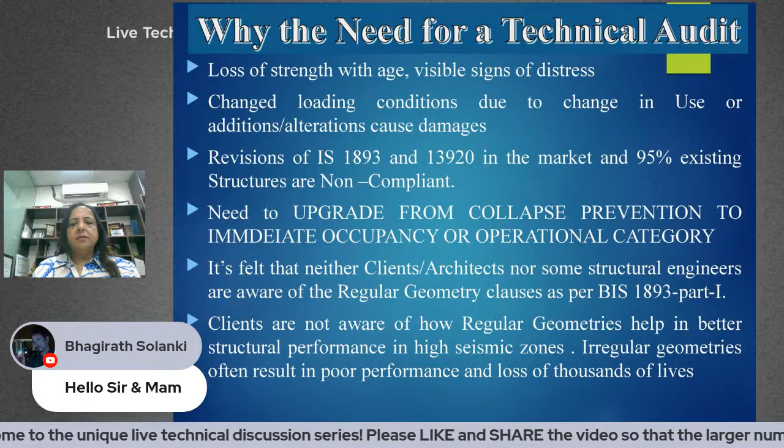We need technical audit because with age, buildings lose strength and there are visible signs of distress. Also, there are changed loading conditions sometimes due to change in use or additions and alterations carried out by the owners, and some structural elements may, in the process, get damaged. There are revisions of IS 1893 and 13920, our earthquake resistant design code and ductility design code, and 95% of existing structures may now be non-compliant after the 2016 codes came in. So there is a need to review the compliance aspect and carry out an audit and retrofit if required.

Then there may be a need to upgrade from collapse prevention design to immediate occupancy design, or even operational category. For important building structures, owners may place a demand on the structural engineer to upgrade earthquake safety. It's also felt that neither architects nor clients, nor some of our own structural engineers, are aware that regular geometry clauses are there in IS 1893 Part 1, telling us that regular buildings definitely perform better in earthquakes, and we must follow the guidelines as far as possible while planning the geometries of buildings, especially in high seismic zones.

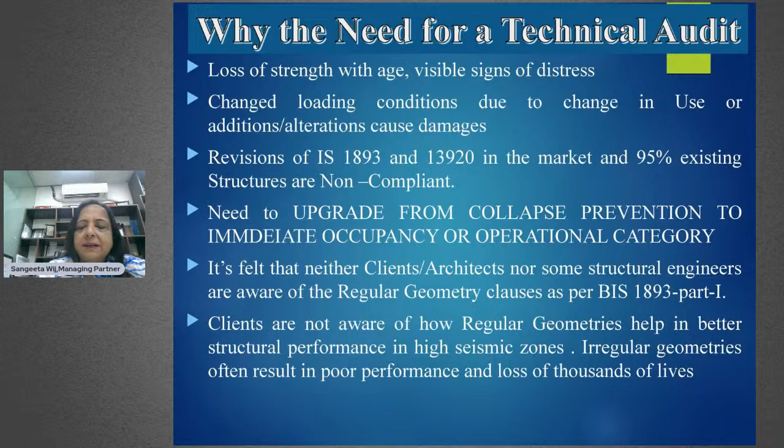Irregular geometries often result in poor performance, as has been proven even in our last experience of a major earthquake in Turkey and Syria.

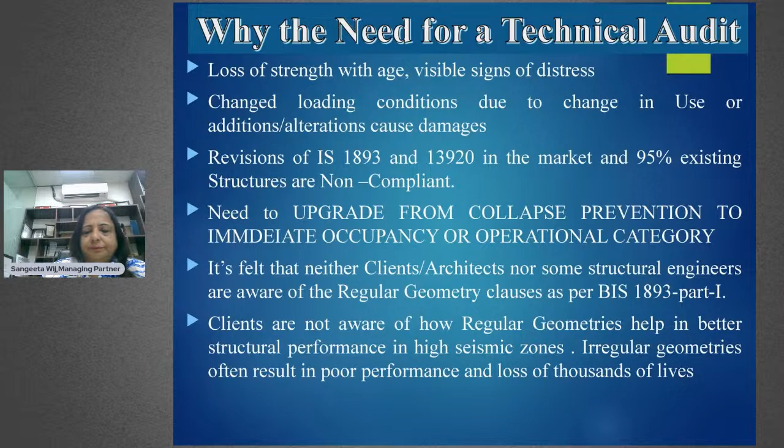In fact, in the National Building Code, there is a requirement in chapter 2 on administration, clause 14.4.2, which reads that all buildings must be subjected to periodic inspection by a team of multidisciplinary professionals of local authority. This work may be outsourced by the authority to competent professionals as deemed necessary. The team shall ensure compliance of bylaws, natural lighting, ventilation, etc., besides structural safety for designated public buildings and areas. This inspection shall usually be carried out every 3 to 5 years, and in any case, not more than 5 years.

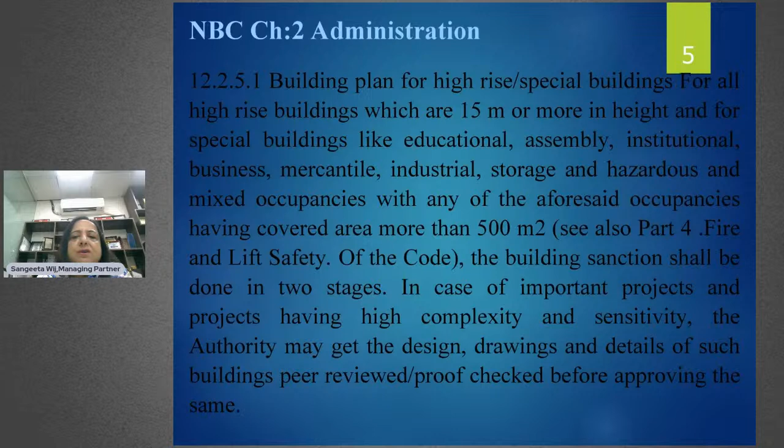What are the documents required for an audit? Architectural plans and elevations, if available, all structural drawings - normally these are never available for older buildings. Structural analysis and design model in StaadPro or ETABS - normally, with our experience, we've seen that it's impossible to locate this, especially for structures existing even 10 to 15 years. We are never able to locate the analysis or design model in StaadPro or ETABS.

Then it's important to look at the soil report and the groundwater test report, and a preliminary site inspection report is necessary for any observed tilting, bulging, unequal settlement deflections, cracks, or seepages.

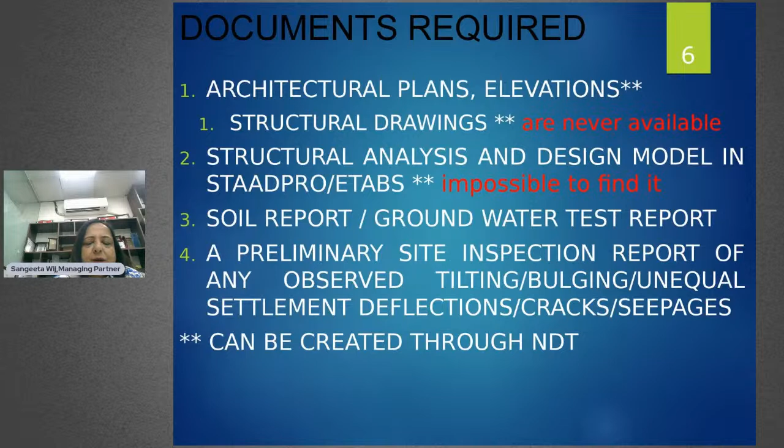So what I was saying is that supposing we do not have structural drawings, we can create the approximate structural framing and reinforcement drawings using suitable NDT techniques - we'll talk about them a little later. We can use rebar scanning to create the reinforcement profile. However, there is a limitation, because we can't do rebar scanning of all the beams and all the columns.

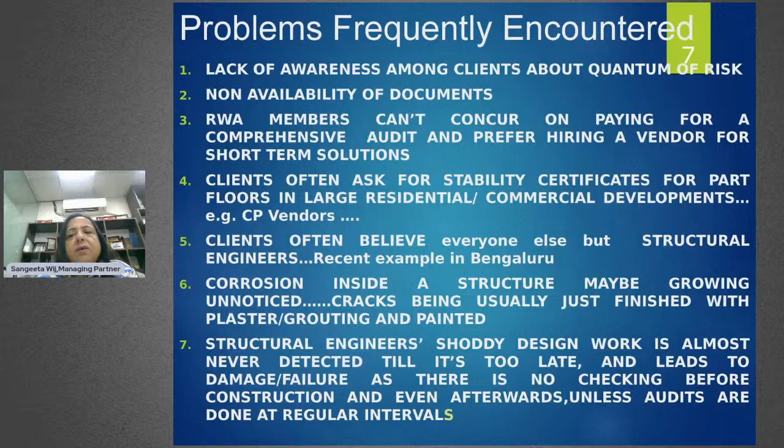So, which are the problems frequently encountered when we are doing a technical audit? The first problem is that clients have no awareness about the quantum of risk involved in continuing with an old and dilapidated structure. He's not aware what kind of risk he's facing, and he's worried he'll have to go through a lot of disruption in his normal routine. The building will need to be opened up, and the structure will need to be partly broken up to create suitable space for retrofitting.

So he's more anxious and worried about the money part also. Now, the biggest problem is non-availability of documents. Typically, RWA members can't agree on paying for a comprehensive audit, and they usually prefer hiring a vendor straight away - maybe the most popular thing is to hire a vendor for fiber wrapping, concrete jacketing, or steel jacketing and just get the retrofitting done.

Now, clients often ask for a stability certificate even for part floors. This is the biggest challenge - some of my friends and BNI chapter members call and say, I live on a floor in a particular housing development, can you please audit and retrofit my floor? That is unfortunately not feasible.

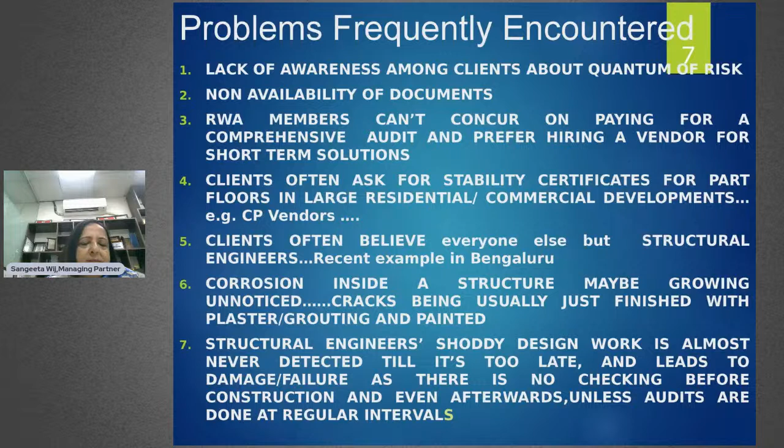Bhavin, I'm running into a little problem here. I can't read the last part of my slide because I'm seeing this message. Can I remove that? It's the seventh point. Can you read it out? Sure, it says that structural engineers' shoddy design work is almost never detected till it's too late and leads to damage or failure, as there is no checking before construction and even afterwards unless audits are done at regular intervals. So how do I get rid of this message at the bottom of my screen? It's slides, video file, and share screen. Okay, how do I go back?

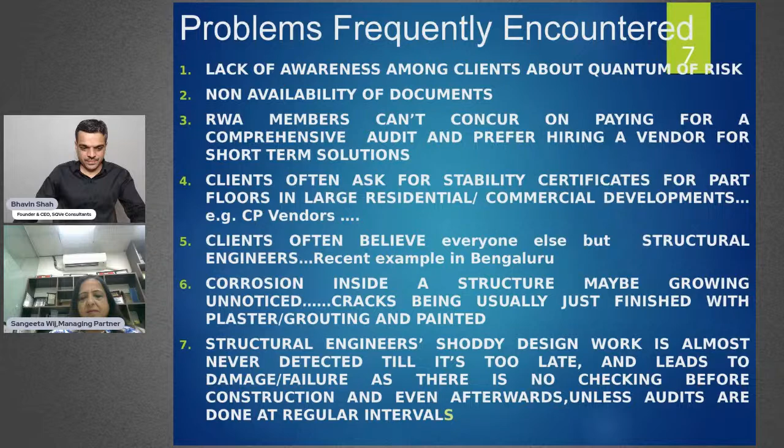So how to carry out a comprehensive technical assessment? Study the available information, including architectural and structural drawings, soil report, water test report, and analysis design model on STAADPRO or ETABS. I'm hoping all these things are available. If not, we need to carry out measurement at site to identify the structural system and create a structural framing plan with the beam, column, and shear wall sizes.

Next, we use rebound hammer or core cutting tests to establish average compressive strength of concrete in beams, slabs, columns, and foundations. After that, we use NDT techniques like rebar scanning to find reinforcement details and create a set of structural drawings. If drawings are already available, it's a bonus for you and the client because rebar scanning can be avoided. Otherwise, we have to create reinforcement drawings for the existing building before modeling can be taken up as a next step.

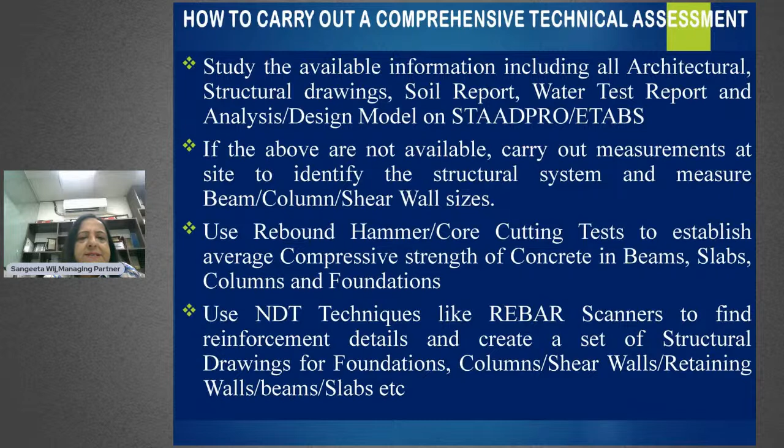So we create a model in STAADPRO or ETABS. However, the base shear to be used for earthquake can be reduced depending on the age of the building, as laid down in BIS 15988. The reduction factor can vary between 0.7 to 1, depending on how old your building is, the availability of documents, and how reliable are the drawings and documents available.

It's important to note that for analysis and design, we always use the revised current seismic codes, not the older versions. Some clients might tell you that my building was done in 1990, so check it with the 1990 code or the code prevalent at that time, but that is not the correct procedure. If we go through 15988, it's clearly laid down that all audits have to be carried out with the latest revision of the earthquake codes. All we are allowed to do is use the modification factor as per 15988.

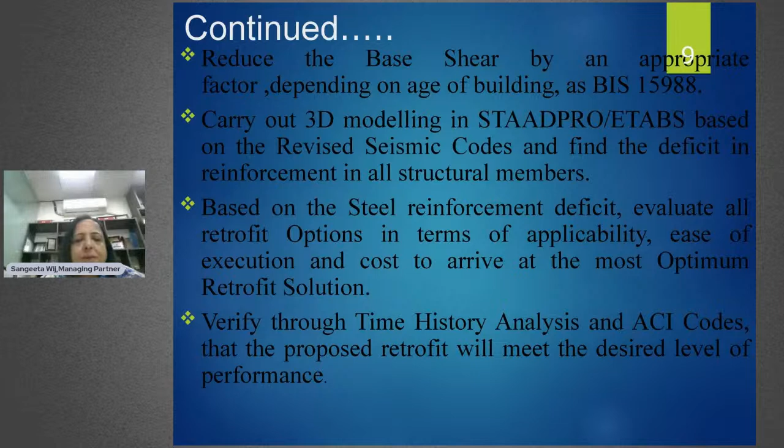So we have already talked about the NDT techniques available briefly. We do core cutting to test concrete strength, rebar scanning where reinforcement is to be determined, half cell potential test to check for possibility of corrosion, and UPV for checking integrity of the concrete within columns, beams, and slabs.

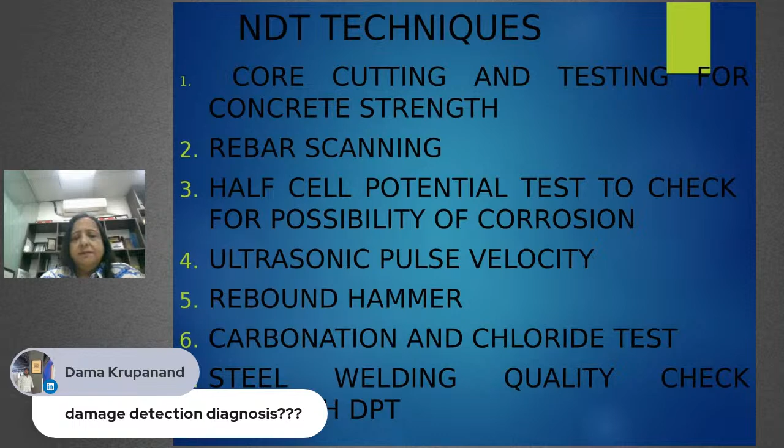Rebound hammer can also be used where the client is not allowing core cutting, however the results are not as accurate or reliable as core cutting results. We also do carbonation and chloride tests for concrete where we suspect corrosion. For steel structures, we can take samples of steel and test its strength, and also test the weld quality.

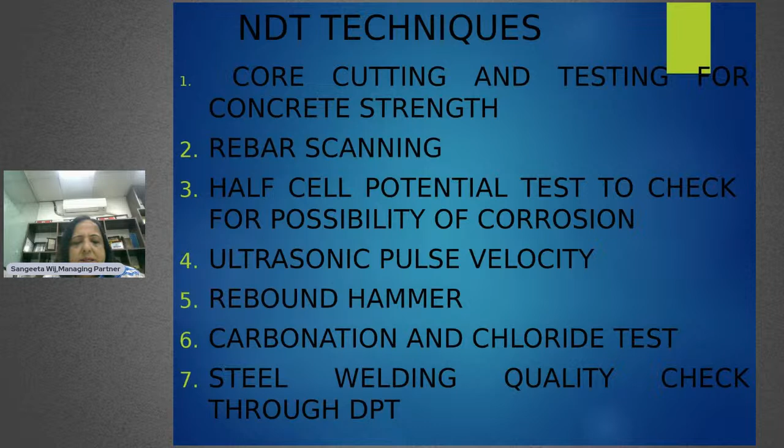For strengthening, we start with simple techniques like guniting or pressure grouting for masonry structures and abutments. For concrete, we can use concrete jacketing for moment frame structures. We can also do steel jacketing or carbon fiber wrapping, or provide bracings on peripheral walls while treating inner columns as gravity columns.

This applies to buildings where the client does not want you inside, which can be a functional industry or a functional hospital or whatever. So it is possible to treat a building only from the outside and create additional structural elements.

These will be designed to carry all the earthquake shear, or the additional earthquake shear, which the structure is not able to take. We can also provide dampers and add base isolation systems. And we can also add shear walls if the client allows you to do that.

In one of the projects that we had seen on Dwarka Expressway, we had to use sacrificial anodes to tackle acute corrosion status.

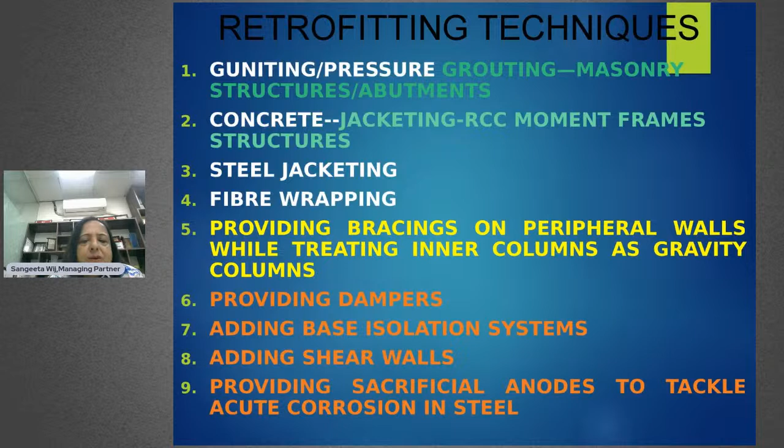So basically, I'm going to talk only till this point here. But I also want to show you quickly, in just the next 2 minutes, as to what do we mean by collapse prevention or immediate occupancy or operational status.

So world over, the earthquake safety of buildings is of 4 categories. The highest is fully operational, as practiced and adopted in Japan, LA, New Zealand and other developed nations. Next lower is immediate occupancy, then comes life safety, and then comes collapse prevention.

Our code in India had started off with collapse prevention. We were a poor country when we started talking in terms of earthquake resistant design, way back in the early 80s. But now the code is being revised to upgrade the safety slowly to higher levels.

And this is how these 4 levels look, and it should give you some idea. This is where our collapse prevention design is, mostly where the building will not have any reserve strength after a major earthquake has happened. It will be compulsory for the owner to dismantle and build again. It'll just give you enough time to evacuate the near and dear ones.

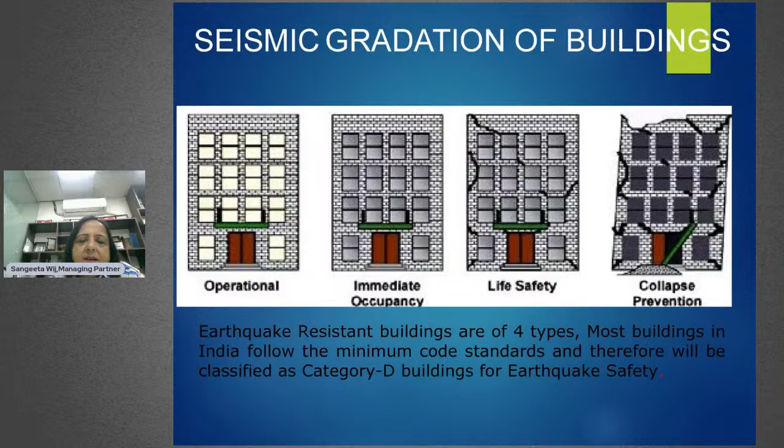Okay, yeah, so this is the first question I would like to take. I have this Ujma Khan from LPU. So she's talking - it's a she or he, I don't know. Ujma can be a girl or a boy.

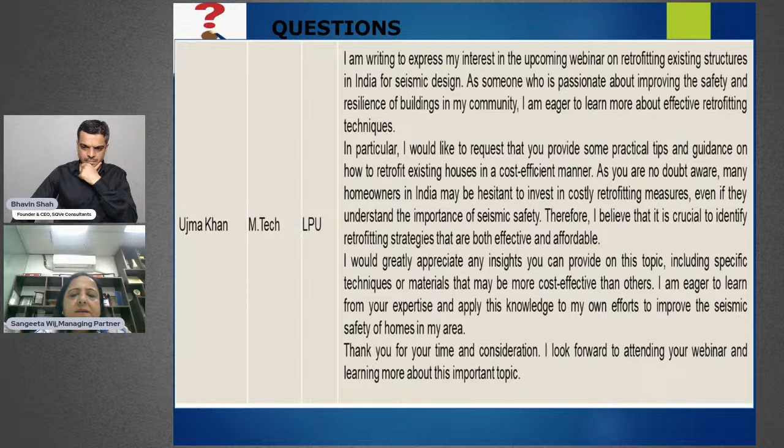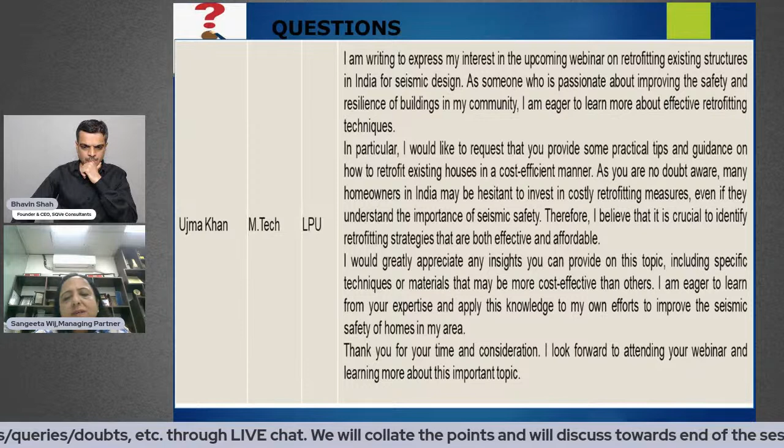So, Ujma, it is important to understand that no technique can be prescribed for all the buildings. No one solution can fit all the buildings. Depending on your project, depending on the requirement that the client has, whether it's concrete or steel, whether it's a functional building or a non-functional building, we have to decide on the strategy that we are proposing.

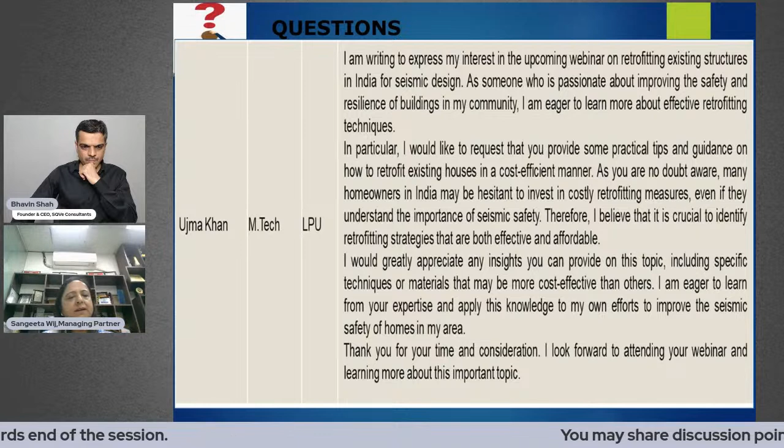We can't just say that I only want to do concrete jacketing - it doesn't work that way. We have to evaluate the available options. We may like to give the client an option of concrete jacketing or steel jacketing if he is allowing us to enter the building and do this treatment to his structural elements. But if this option of going inside is not at all available, then we have to work from outside and maybe look at giving dampers or bracings or adding shear walls externally.

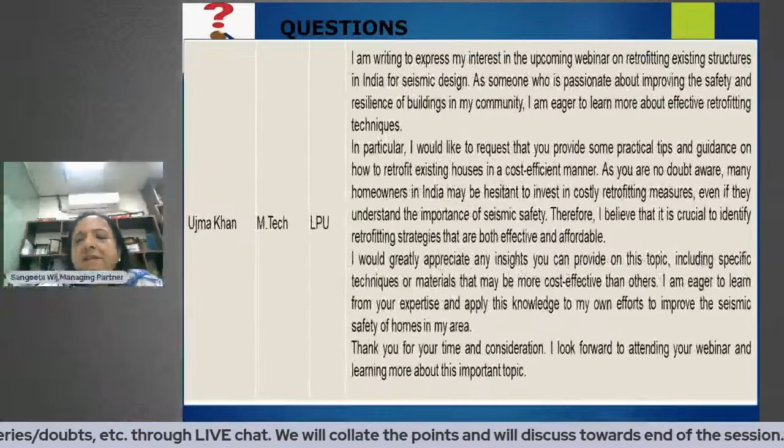So cost sometimes is not the only criteria to consider, because I must share with you that retrofitting involves double costs - not just the cost of retrofitting, but it also involves the cost of breaking open and making good.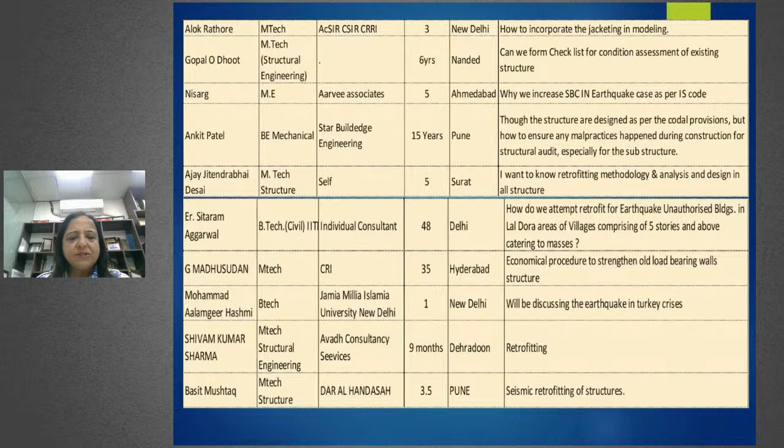Then Shivam Kumar Sharma from Avadh Consultancy Services - Bhavin, I'm not able to see his question here. Yeah, he has just only written retrofitting. So this we have already discussed. The last point is also about seismic retrofitting of structures, that also we have discussed. So we can move to the next one.

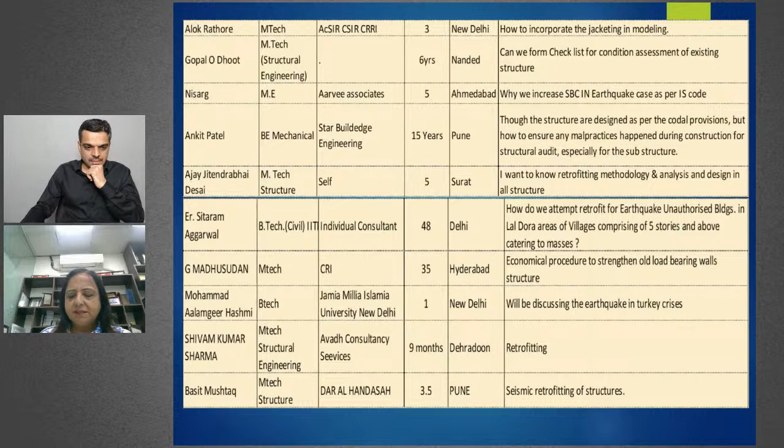So then there is Girija from Chennai, from DAC Developers. She says, how to ensure if a building is basically safe for earthquake. I've already told you, just evaluate, model it as you model a new building.

Depending on the age, use a modification factor. Now compare it with the earlier available strength. We have to work out the demand as if it's a new building. Use a modification factor if it's 10, 15, 20, 30 years old. And if we are not sure, evaluate the concrete strength. So now when we are modeling and running it as per revised codes, use the strength you have found through NDT tests and use a modification factor. Now find out the gap and design a retrofitting scheme.

So Sujata Unnikrishnan from Bangalore says, kindly discuss case studies, failure of structures and remedial measures. I think I can show some case study at the end if we still manage to have some time. I would like to cover all the questions first. Sujata, we'll come back to this.

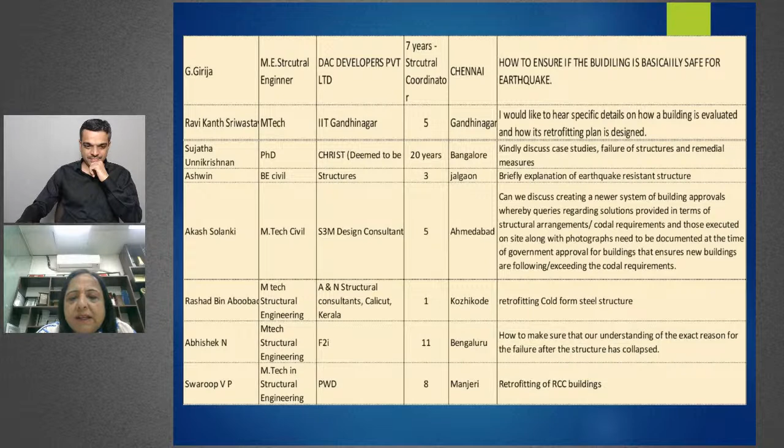Where is the government approval happening? Who checks our structure, what we have designed? We are very unfortunately in a scenario where structural design of a building as a routine is not being checked at the authority level at all. That is why my emphasis is on technical audit - that if someone does an audit, then it will be known whether your building is correctly designed or not.

I think what you just stated is a wishful scenario. I wish it happens someday.

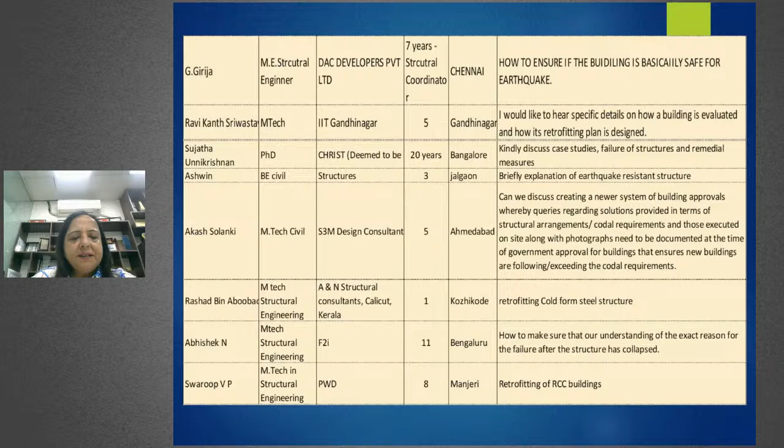Rashad Bin Aboobacker from Kozhikode, from A&N Structural Consultants, Calicut, Kerala.

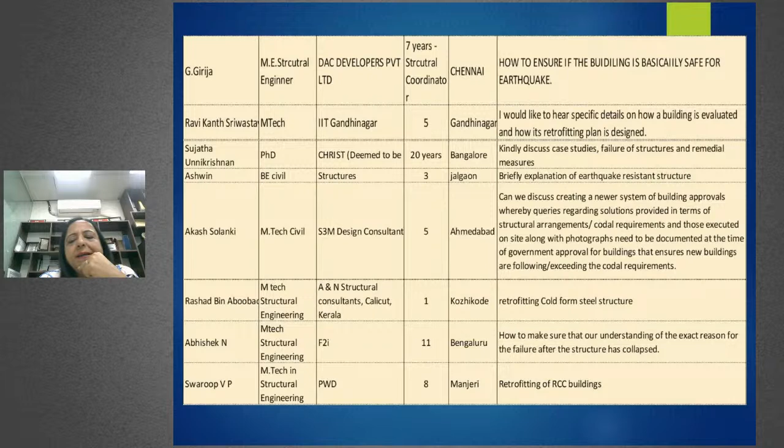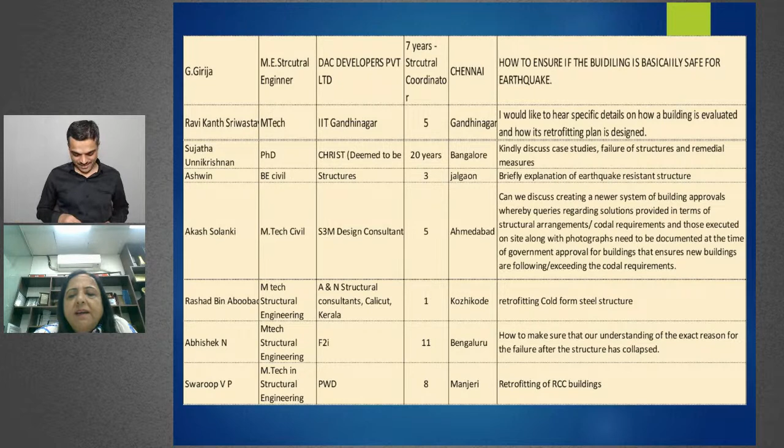He asks about retrofitting cold form structure. Retrofitting cold form steel structures may be a bit dicey, we've not done anything so far on this. Bhavin, would you like to talk about it? Because the thicknesses are very small, it's a very lightweight kind of structure, so retrofitting may be more challenging than retrofitting a normal steel structure.

Absolutely right. So I think if there is the problem of corrosion, then the only option is we need to replace the member. We are doing that. In fact, we recently audited a very large steel roofing in one of the import-export buildings in Delhi Cargo Terminal.

All the sheet was corroded, and some of the purlins were also corroded, so there was no option but to replace that kind of structure completely. But usually the cost involved is pretty high, so the client shies away from doing it for as long as he can hold it.

Abhishek asks how to make sure that our understanding of the exact reason for the failure is correct after the structure has collapsed. So it's talking about forensic investigation for structures.

That's an interesting question. It brings me to a statement that I'd love to make, that in India nobody studies failures. In India we like to brush our faults under any carpet we can find, and nobody wants to talk about it.

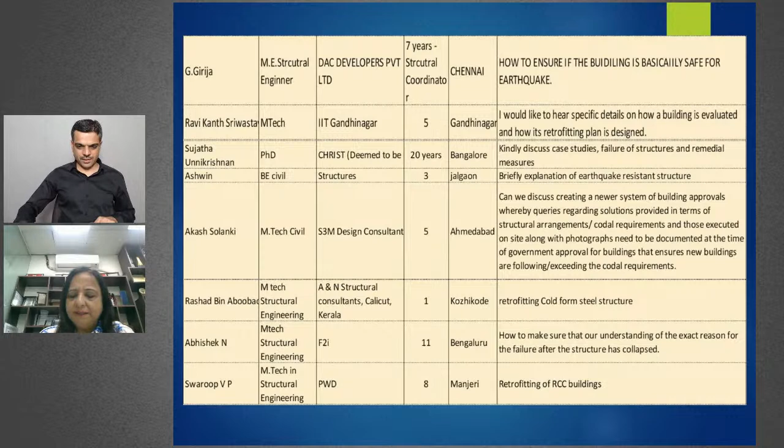Then Arun Kumar Mariappan from Mumbai asks, in structural welded connections under seismic resistant design, is it mandatory to go with CJP welding?

What is CJP welding, Bhavin? Yeah, it's complete joint penetration welding, so it's a butt welding, complete joint penetration welding.

Section 12 of IS 800-2007 says very clearly that all welding joints shall be considered as CJP, or let's say butt welded joints. So there you have your answer, Arun.

Then we must also note that in seismic zones, we have to carry out ductile detailing of all joints, even for steel structures. Guidelines are available in Indian codes, and we have to follow the same.

Then Faizan has asked about structural assessment audit, we've talked about it. Balachandra Patel has asked about retrofitting, we've talked about it.

Sivaraman Rajendran from Riyadh asks about use of latest materials for seismic retrofit. Yes, we can look at all the materials available for seismic retrofit. Some of the newer materials like carbon fiber and other similar fibers are available for wrapping around columns and beams. However, we must note that every technology will have its limitation, especially with fiber wrapping.

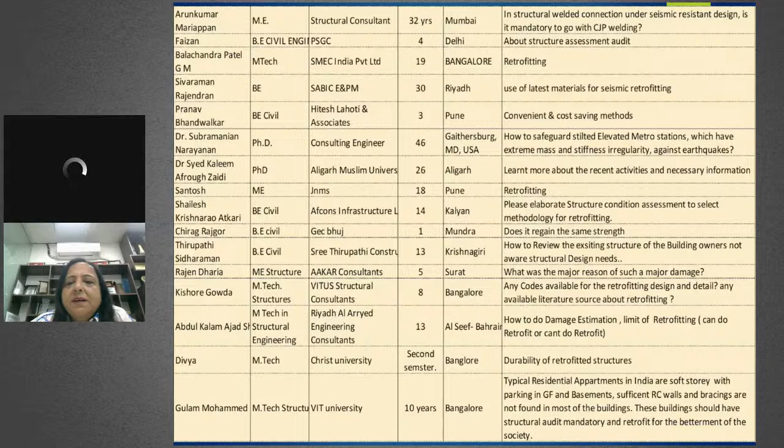We also have Dr. Subramanian, who asks how to safeguard stilted elevated metro stations which have extreme mass and stiffness irregularity against earthquakes. I have been raising this question in almost all my talks for many years. I know these stations need to be reviewed, especially after the 2016 codes came in. I had personally gone to DMRC and tried to meet their director and their CGM designs.

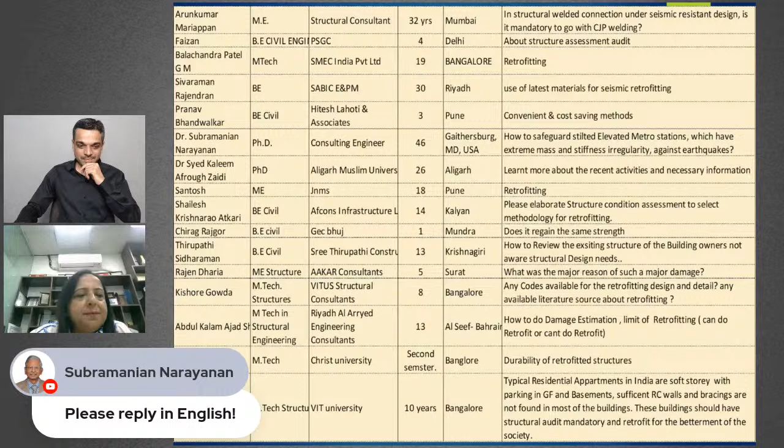Okay, sorry, you don't understand Hindi. I do, I have a bad habit of switching over to English or Hindi or Punjabi sometimes.

The basic problem now is that unlike the 2002 code, which had a provision for designing stilted columns and beams for 2.5 times the earthquake load, that clause was withdrawn in the 2016 version. For stilted buildings and soft story floors, we need to add either shear walls or bracings. These two options are available, and elevated metro stations will eventually have to do that too. I hope good sense prevails and they investigate and get the retrofitting done.

Then there is Dr. Syed Kaleem Zaidi from AMU, who wants to learn more about recent activities and necessary information. I wasn't sure if he was asking or making a statement, but yes, he just wants to know about recent updates.

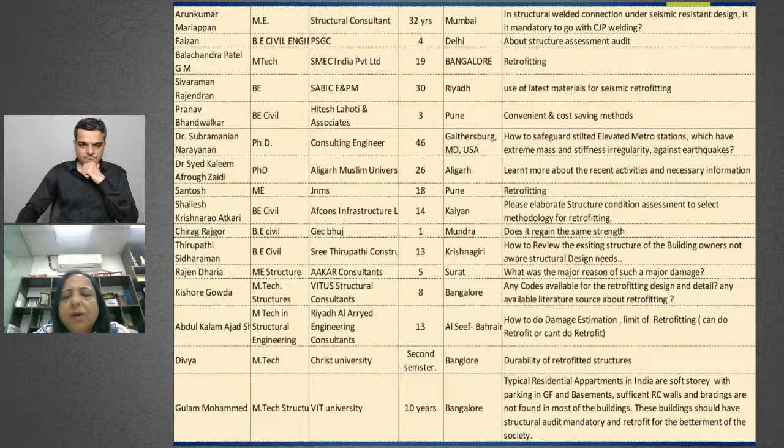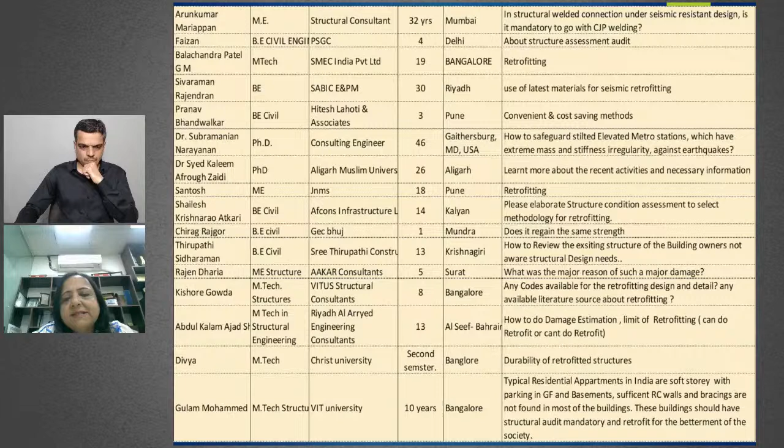I already said that the major damages happened due to non-compliance mainly and irregular building geometries. You may have seen from images, pictures, or videos that failures happened, crushing the stilt floors completely, and buildings came down in a matter of seconds. The lower story or stilt floor was completely crushed. Even precast buildings got damaged. That is why our codes are still talking about cast-in-situ buildings in earthquake zones being the preferred choice, and regular geometries are a must.

I hope all of you are aware that there is a very elaborate set of clauses in IS 1893 Part 1, and now also in Part 2, about the irregularity of a structure. It has been defined very clearly, and a lot of care and thought has gone into defining various limits of irregularity, and how an irregular building has to be treated has also been given. So please go through that and try to design regular buildings when working in seismic zones 3, 4, and 5.

Kishore Gowda from Bangalore asks, are any codes available for retrofit design and detail? Any available literature source about retrofitting? Yes, I think there is a lot of technical literature available, including the BIS codes I just talked about. Other than IS 15988, there are a series of codes like IS 13935 and IS 4326, initially for masonry structures.

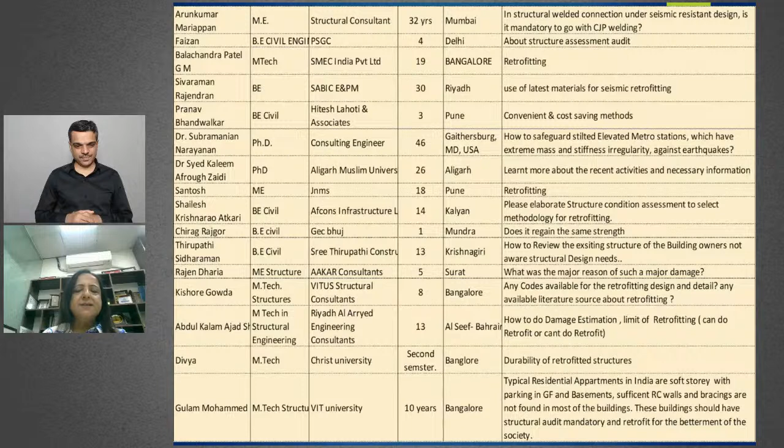Stilts are now made mandatory. If I'm planning a new house in Delhi, I can't get my plans approved unless I go in with stilts. Unfortunately, clients don't concern themselves with structural design requirements so much. They're more worried about functional requirements, aesthetics, parking facilities and so on. So sometimes these provisions in bylaws have an adverse impact on structural performance, but we have to live with it. Now our code suggests we can add bracings or RC walls as written. This should be done in all housing societies where stilts are there.

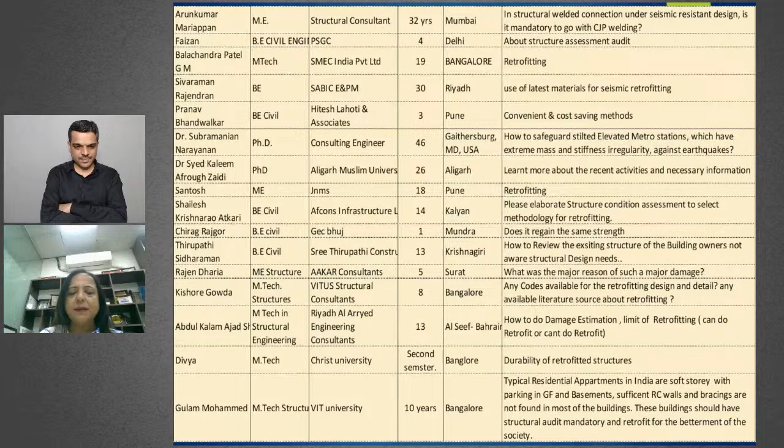Tamil Selvan from Chidambaram asks for retrofitting clarification, but he hasn't written what clarification he wants.

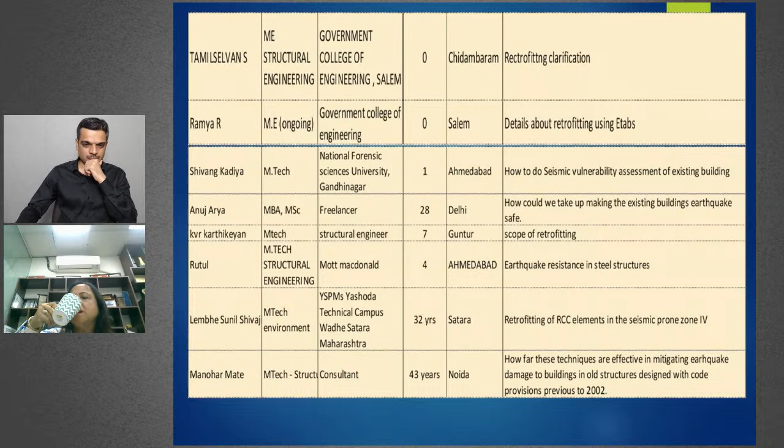Ramya asks for details about retrofitting using ETABS. It is possible to model the structural elements with a jacket, and ETABS permits you to do that. If you have a problem, you can contact the ETABS vendor. They are very helpful and respond immediately to technical queries. You can connect with them, and if it still doesn't get solved, you can connect with me.

Shivang asks how to do seismic vulnerability assessment of a building - we've already talked about this. Anuj Arya asks how we could make an existing building earthquake safe - this is what today's webinar is all about, and we've already talked about this.

Rutul asks about earthquake resistance in steel structures. Resistance in steel structures is as important as it is for concrete buildings. We need to make an assessment, find the deficit, and strengthen it. We can add steel plates, angles, channels, or bracings. There are a number of options available to make amends for earlier mistakes.

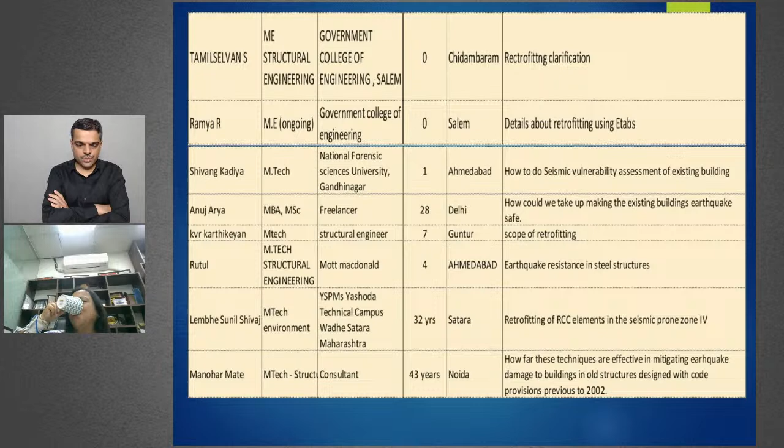Manohar asks how far these techniques are effective in mitigating earthquake damage to old structures designed with code provisions previous to 2002. I think we have not carried out any such extensive research as to how much, in percentage terms, is the effectiveness in mitigating earthquake damage. It's only when an earthquake really happens that we'll get to know the actual effect, but it definitely adds to overall performance and useful life to the structure.

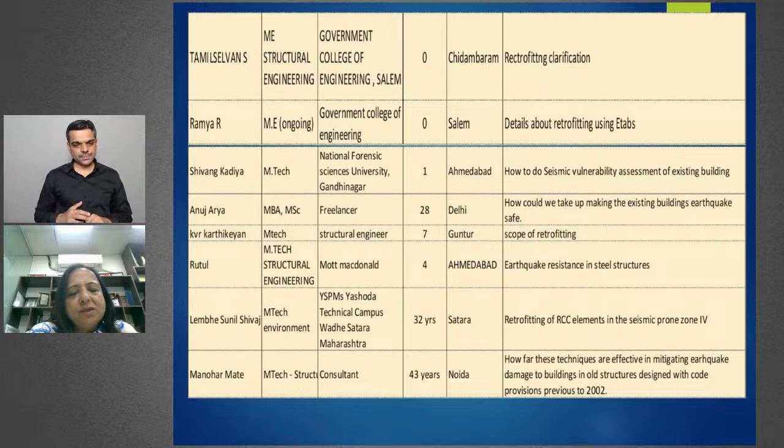We must understand that a building has a design life of 50 years as per Indian codes. But in India, we tend to continue with a building - we keep dragging a bad structure for sentimental or commercial reasons. If we retrofit it sensibly, I think we will easily add at least 10 to 15 years to its life.

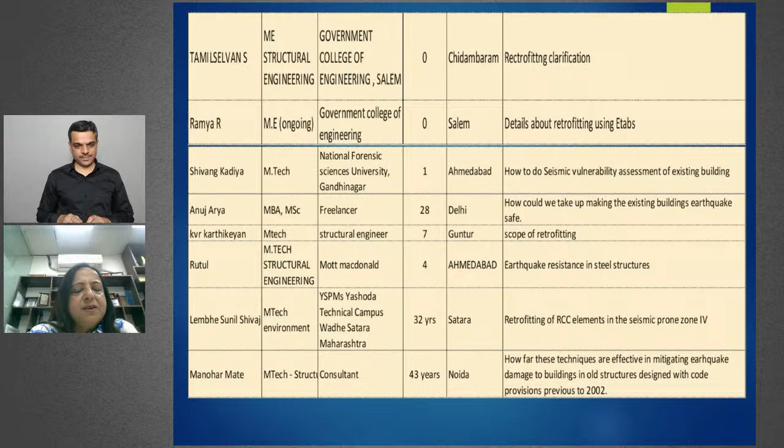Ranu Chauhan asks how to make retrofitting of houses an owner-driven approach. I don't think I can help much here. When we buy an expensive car, we love to maintain it, but when we buy a house, we somehow think safety is the developer's or government's prerogative. It doesn't happen like that - a building is an investment you made consciously, and maintaining it in the best structural health is also your prerogative. As an owner, you have to take a conscious decision.

Unfortunately in India, we don't place enough value on our own life or our family's life, and we take it very casually. We have a 'chalta hai' attitude - you're a Delhi wala, so you'll understand. In Delhi, typically there's a 'sab chalta hai' attitude, which is not a good approach.

Rayees Ahmad Bhat asks about retrofitting of existing masonry structures in seismic zone 5.

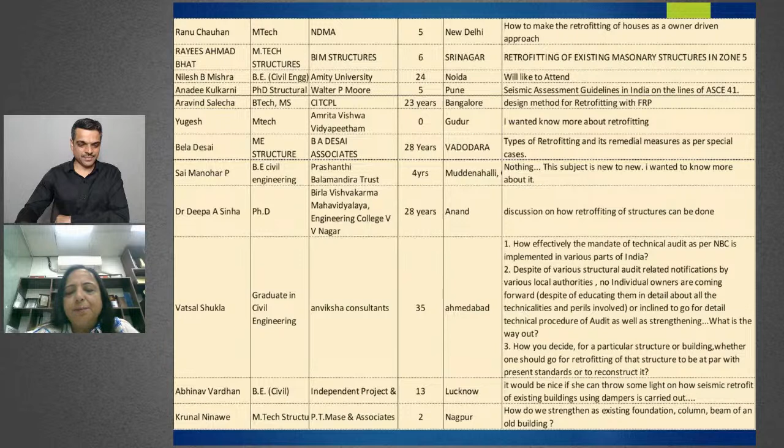What we are trying to do here is enhance the damping of a building structure by using dampers, but the percentage damping allowed will be dictated by the product you're using. Unfortunately, till now, dampers are not being manufactured in India. I think under the Make in India campaign, Bhavin, you should probably spearhead a movement for people to start making it in India. But unfortunately, this particular product comes from abroad, maybe Taiwan, Germany, US, or some such country, and they will tell you the capacity of the damper and the percentage damping you're allowed to use in your structure.

And then you run the model and see how well we are meeting the objective, and where the hinges are formed, have we achieved the objective that we started with.

I hope I've answered Abhinav's question. Then we have Krunal Ninawe asking: how do we strengthen the existing foundation, column, and beam of an old building?

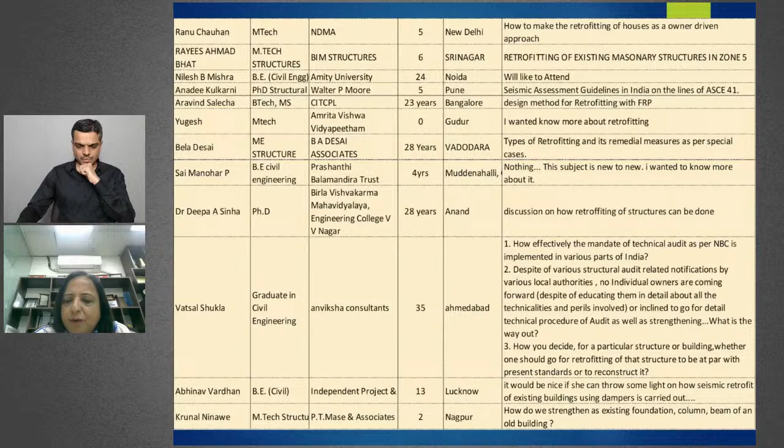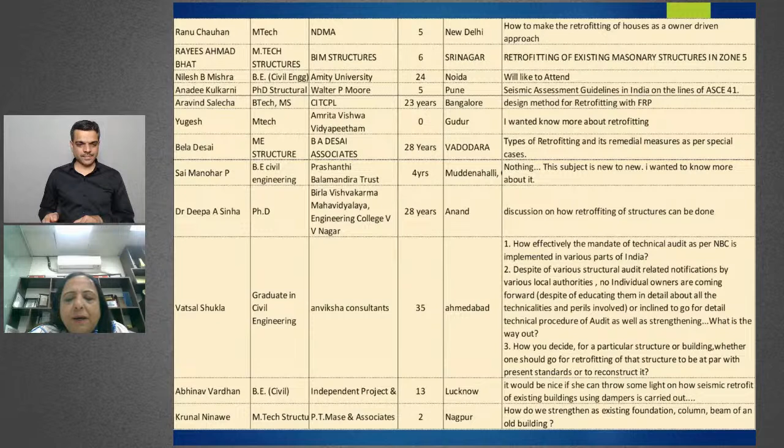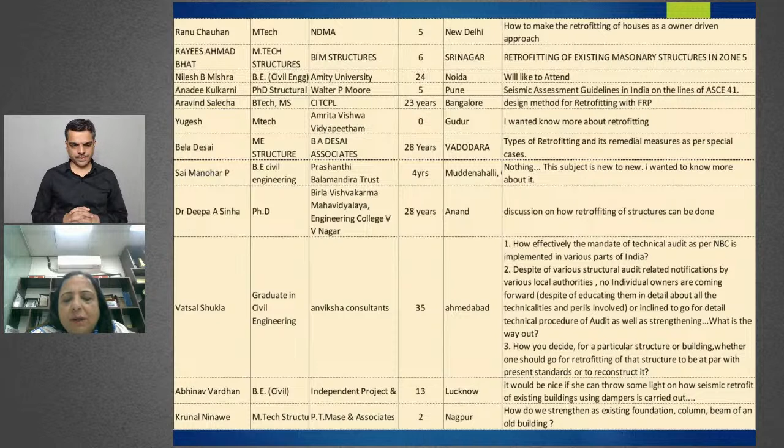Strengthening an existing foundation is not very easy. It is challenging because you have to break open the plinth floor, reach the foundation, and either remove concrete from the periphery of the foundation, tie new reinforcement bars with the old ones, and extend the size of the foundation. Or if you want to add depth to the existing foundation, you may have to use rebarring techniques to add new reinforcement to the column, then pour concrete after putting shuttering on the edge.

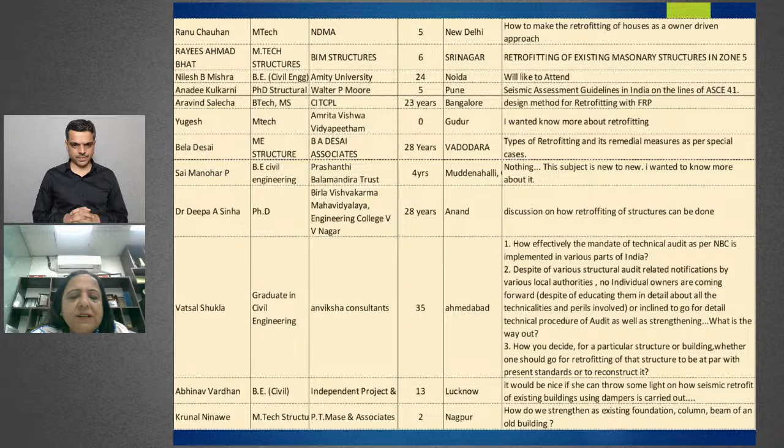Strengthening existing foundations is a very, very challenging task, and most clients will not allow you to do it, especially if the building is functional.

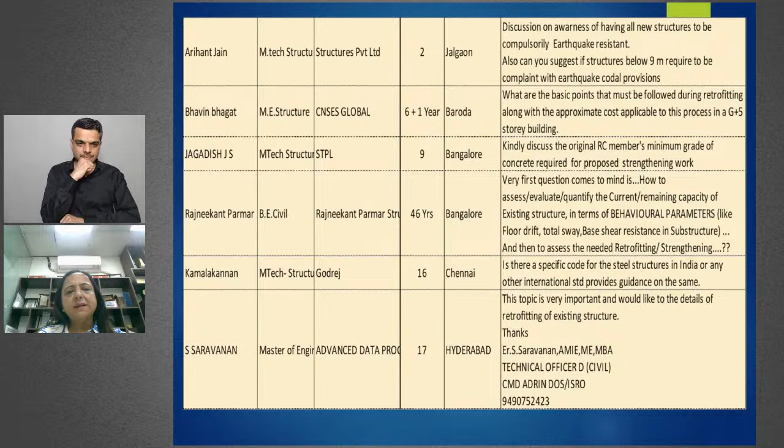Arihant Jain asks for a discussion on awareness of having all new structures compulsorily earthquake resistant. Arihant from Jalgaon, I have to tell you that the code in India has given excellent guidelines. As structural engineers, it is upon us to follow them and make building structures which are earthquake resistant. Nobody is stopping you from doing a good code compliant design.

I think our codes are, if not the best in the world, pretty decently framed. All structural engineers must follow them and make buildings earthquake resistant, depending on whichever zone the structure is in.

Also, can you suggest if structures below 9 meters are required to be compliant with earthquake codal provisions? Oh my God, have you forgotten what happened in Bhuj in 2001, Arihant? We lost lives mostly in single and double storied houses, which were mostly unengineered or non-engineered structures, and that was responsible for the largest loss of life.

So it is definitely important to make all structures earthquake resistant, whether less than 9 meters or more than 9 meters, or even more than 90 or 100 or 150 meters.

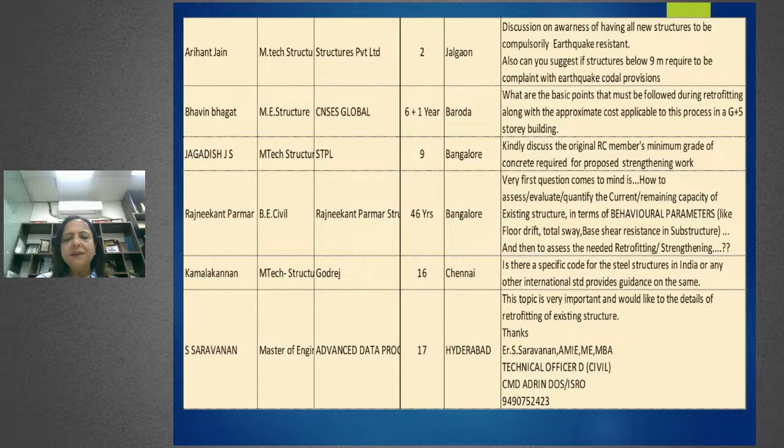Then there is Saravanan from Advanced Data Processing. I haven't understood any question. Bhavin, did he have a question? He says no, he doesn't have any question, he just wants to join the session. Okay.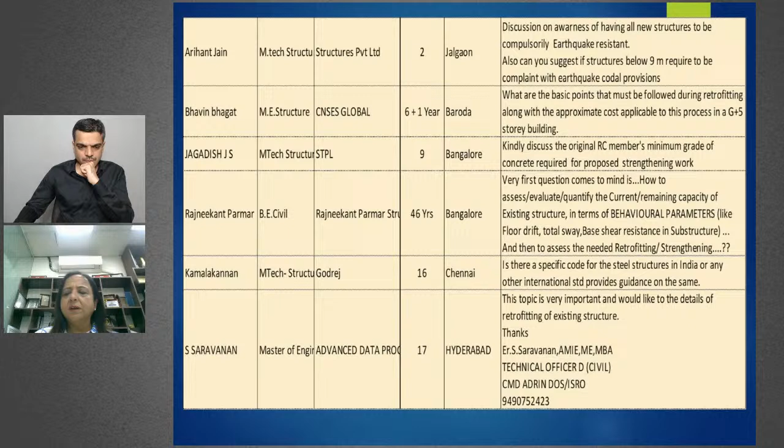Have we exceeded the time? We're nearly close to 6. Okay, yeah, so you can pick up 2-3 points before we close. I think most of the questions that people had been covered.

There's a question about performance of column and beam joint strength complying with IS 1893 code. I don't think we have a field test available for checking the beam-column joint strength. Not to the best of my knowledge, and I don't claim that I know everything.

I'm also a practitioner like all of you, so I also don't know everything. Bhavin, do you have any idea about this? No, there is no full scale test, in my opinion, at this time. Yeah, I don't think so too.

In the current situation, for which structures do we compulsorily consider earthquake resistant design? See, only Abhijit from Mumbai.

We should always consider earthquake resistant design of structures, even if you are in zone 2. Why? Because for important structures where the importance factor is 1.5, your effective zone becomes zone 3, because your earthquake shear goes up. You should in any case make ductile detailing mandatory for all buildings you're designing, because let's not forget the major earthquakes we remember in our lifespan, like Killari and Latur and even Ahmedabad. They were not zone 4 or 5.

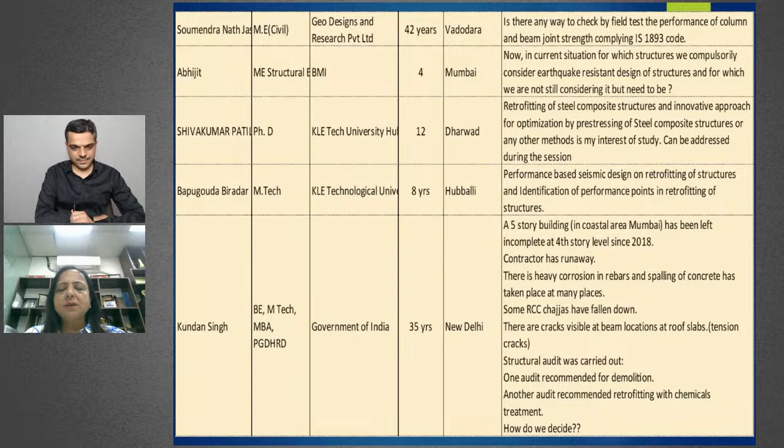Bapugouda from Hubballi asks about performance-based seismic design for retrofitting of structures and identification of performance points in retrofitting. Yes, you model the retrofitted building and check where the hinges are forming. You can go up to immediate occupancy level, as we had done in ETABS ultimate version. It's possible to do it.

Then Kundan Singh's question is rather long. A five-story building in a coastal area of Mumbai has been left incomplete at four stories since 2018, and now the contractor has run away. There is heavy corrosion in rebars and spalling of concrete has taken place at many places.

Some RCC chhajjas have also fallen down, and there are cracks visible at beam locations at roof slabs. Tension cracks are visible. A structural audit was carried out, and one audit recommended demolition of the structure. Another audit recommended retrofitting with chemical treatment.

I think the person who recommended demolition must have been a consultant, and the person recommending retrofitting with chemicals must be a chemical vendor, because clients often get confused and they normally call vendors directly, and any vendor who has a chemical to sell will try and sell it to the client, poor helpless client.

But if the corrosion has happened so much and it's extensive, I really don't think you should continue with the structure. It's always better to bear some loss now, demolish and reconstruct, and make sure that corrosion doesn't happen again.

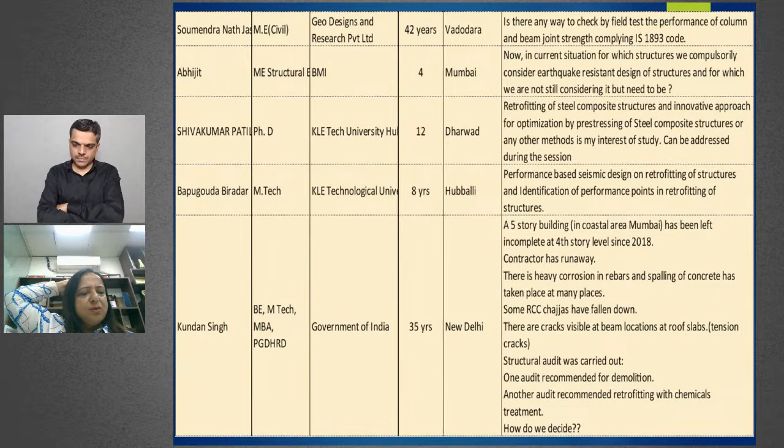Corrosion is like cancer. If you're already at stage 4, it's better that the building should be demolished and reconstructed, but that's not possible in India. We still do not have a proven treatment for corrosion. The only thing you can do is clean it up and use some chemical for reinforcement, but for a structure which is already cast, how do you reach the reinforcement? The chemical will not be able to reach the periphery of every reinforcement bar, so there's no point. It's only for your satisfaction that you've got the treatment done and can go ahead and build the rest of the building, but it might come crashing down someday.

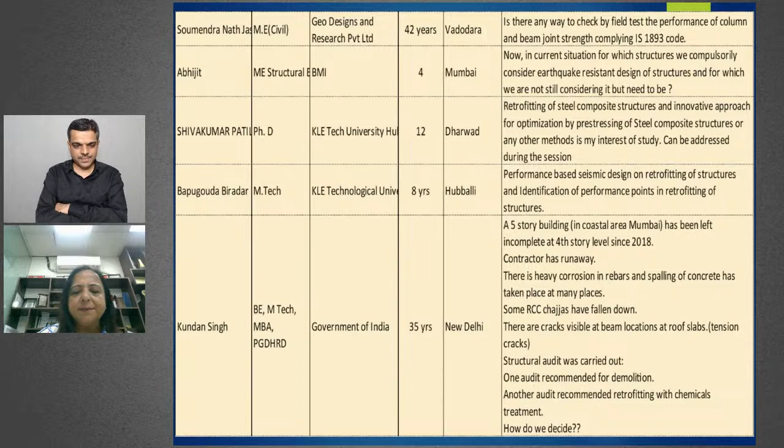Not a good idea. That's it.